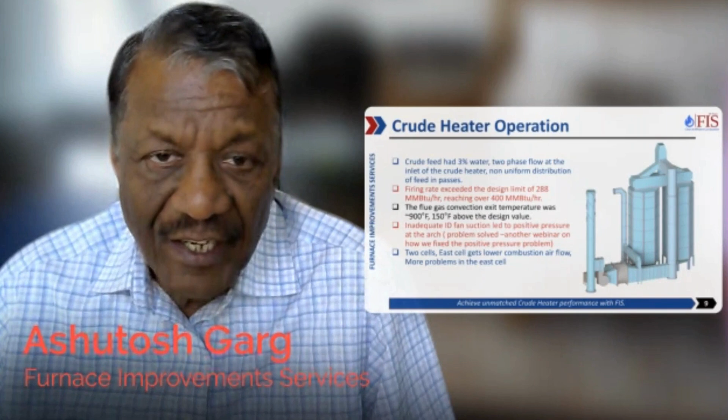The crude heater had other issues, like they had water in the feed. So two-phase flow was occurring in the inlet of the crude heater, and they suspected non-uniform feed distribution in the passes. Firing rate often exceeded 400 million BTUs. The convection section temperature was 900 degrees, and the heater most of the time ran on positive pressure at arch. We solved that problem, and we will have another webinar to show you how we fixed the positive pressure problem with the existing ID fan.

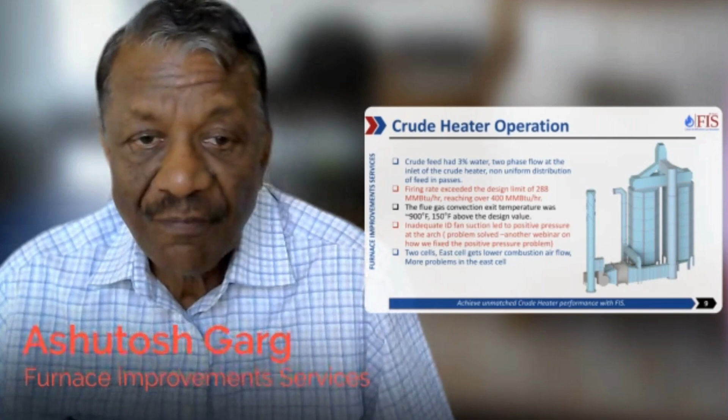The airflow distribution to both the cells was not uniform. East cell would get lower combustion air, and they would have more problems in the east cell. So the heater had lots and lots of issues. We started analyzing it, modeling it. We found that the flux is very, very high, 15,000 BTUs. Bridge wall temperature was almost touching 1800 degrees. There was a lot of overheating and flame impingement on radiant tubes. Burner flames were very long. At about 20 feet elevation, that's where they had the tube ruptures.

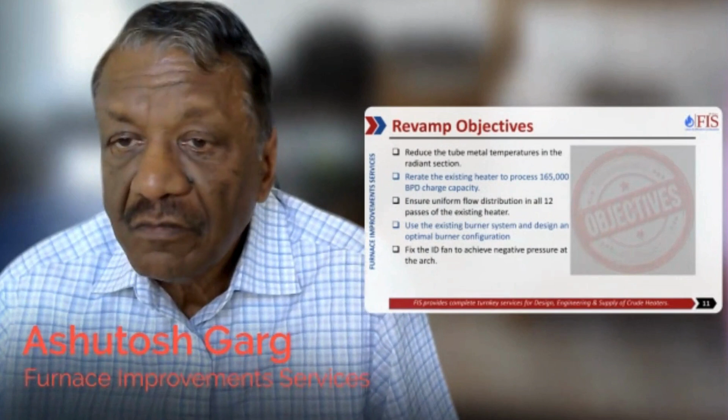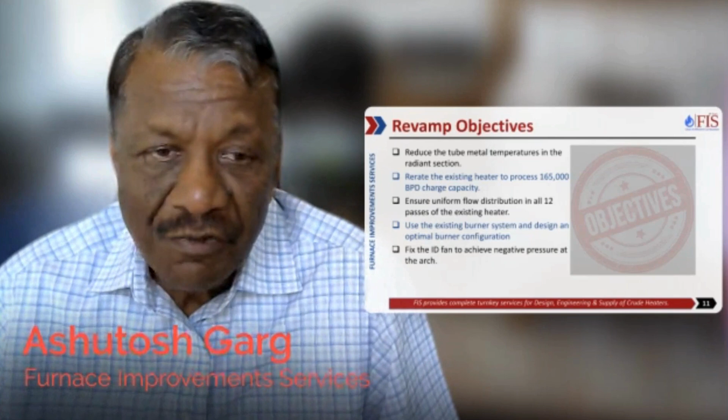So once we analyzed the heater, the client gave us objectives. They said, we want to reduce the tube metal temperatures, eliminate tube failures, re-rate the heater to process 165,000 barrels per day charge, ensure uniform flow into all the 12 passes, use the existing burners, and fix the ID fan. So these were some of the objectives they gave us when we started the study.

And we analyzed it, and after I think about 3 months, we came with a solution saying that we can help you by installing burners at an angle to eliminate flame impingement using our patented inclined firing technology. We also made several other recommendations, including upgrading the convection section to reduce the radiant heat flux and reduce the load on the air preheater.

But the client did not implement any of those recommendations due to cost consideration. Replacing a convection section is a very, very expensive proposition. The client said, we want you to reuse existing burners due to a permit issue, and the burners cannot be modified. So we carried out CFD modeling for almost 6 months with existing burners to arrive at the optimum burner configuration. And it took a long time. They even had an engineering company working with them, so we had to satisfy the engineering company as well.

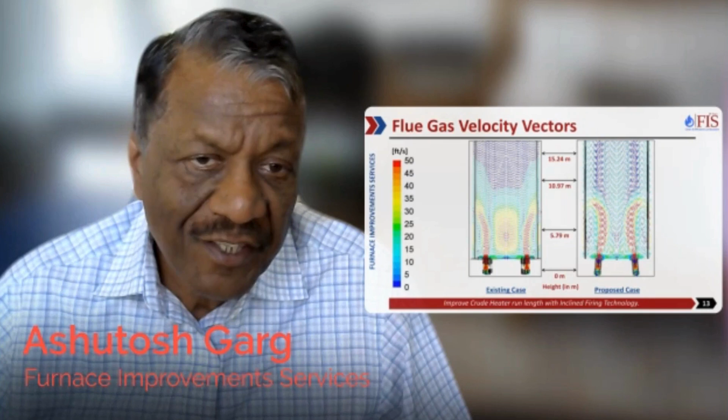And what was leading to that bending of the flames was the presence of flue gas recirculation loop currents in the center, like a vortex. A vortex was forming inside the firebox, and that was pushing the flames to the tubes. So this is the existing. When we put them at an angle, we realized that the vortex has disappeared, and we have the flames going straight up and eliminating the touching.

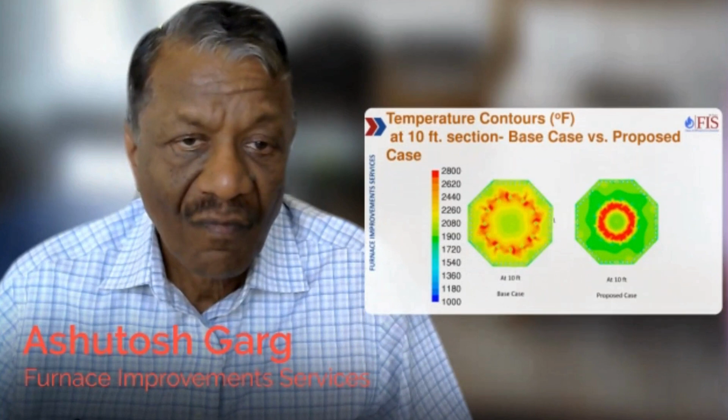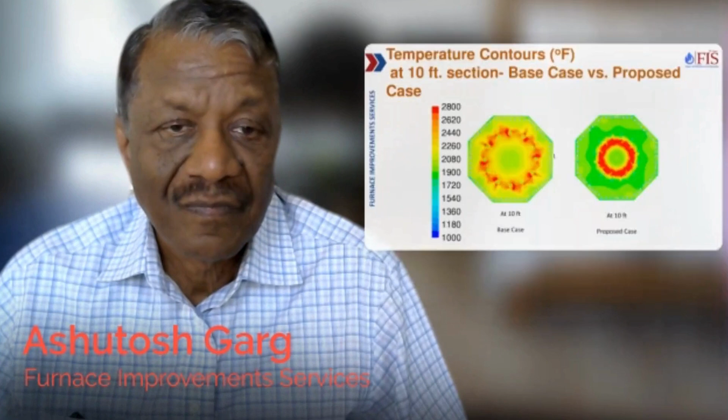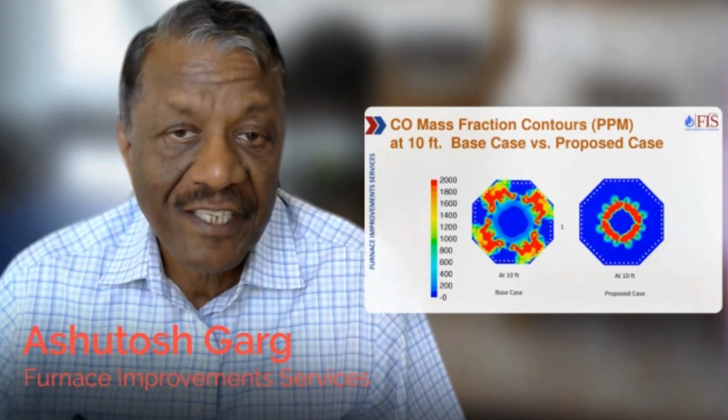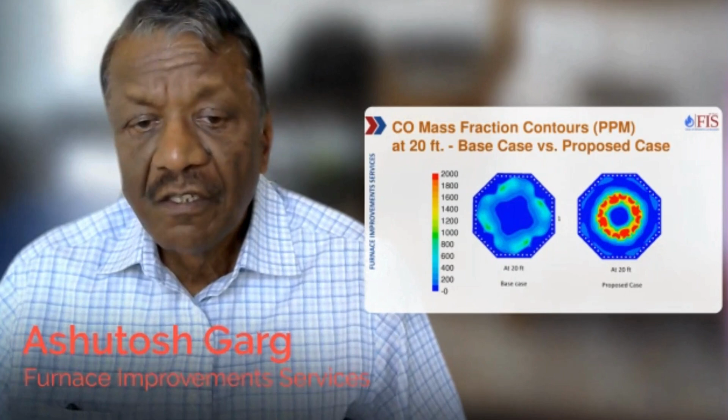This is CO. So we assume that anything more than 2000 ppm of CO is flame actually. And you can see the flames all over in the existing case. And this is the flames in the proposed case. This is at 10 feet elevation. This is at 20 feet elevation actually, which is very, very important. You can see the flames were a little longer, but they were still in the center. So the important point is keeping the flames away from the tubes.

And we did the modeling of the tubes, and you can see it was almost like 1100 degrees F in the bottom 1/3 of the tubes, whereas once we did inclined firing, all the hotspots disappeared, and the tube metal temperature, the heat shifted to the upper half of the firebox.

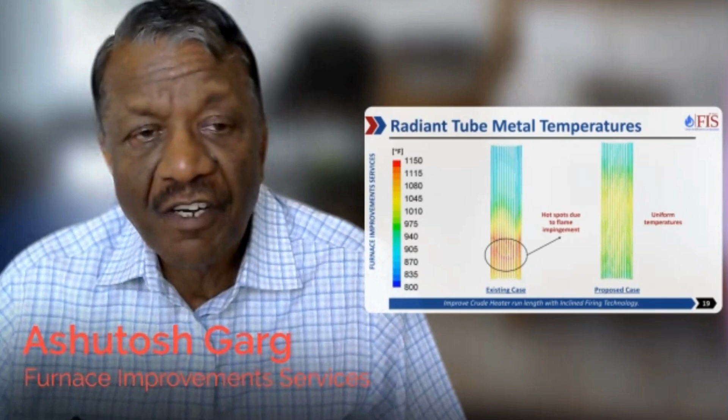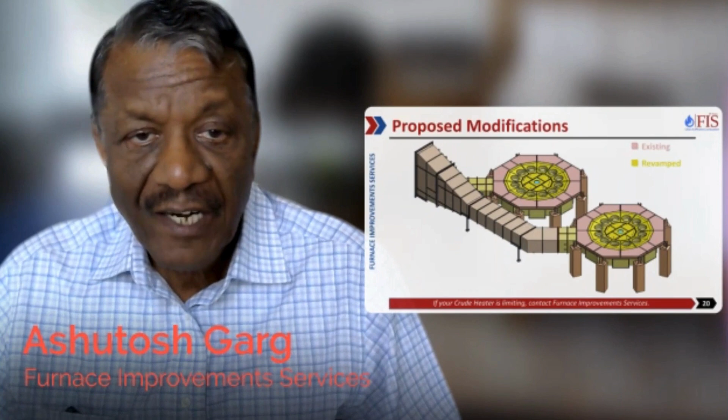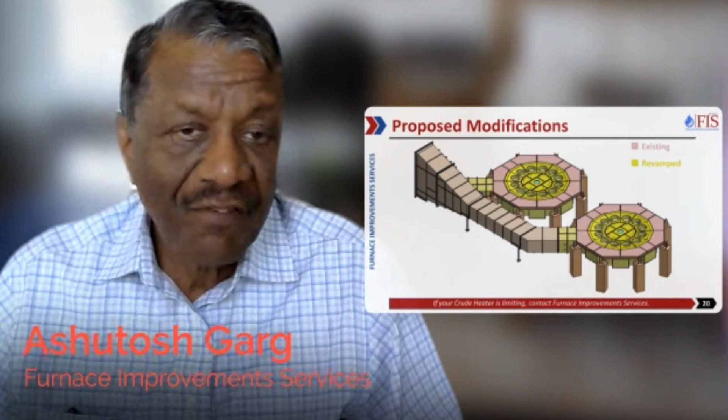So the proposed modifications are only in yellow. We only changed part of the bottom floor in both the heaters and the new plenum. Because we were inclining the burners, we needed to put the burners at an angle, so we needed a new plenum. So that's all the modification which we did. Everything else was existing. Very, very cost-effective modification. And the results were startling actually.

The client started the crude heater in December of 2012. We had given them a guarantee of 100 degrees F on tube metal temperature, and the actual temperature went down by 200 degrees. And the client achieved a run length of almost 6 years. They did not have to shut down the heater, but they shut it down to take care of other equipment.

So inclined firing technology in a nutshell takes care of the biggest problem in heaters, especially high tube metal temperatures or coking or flame impingement, because it moves the flames away from the tubes. It does not make any change in the heat transfer, and we have seen the tube metal temperatures are lower by almost 100 to 200 degrees. Very simple. We can do it in new heaters also.